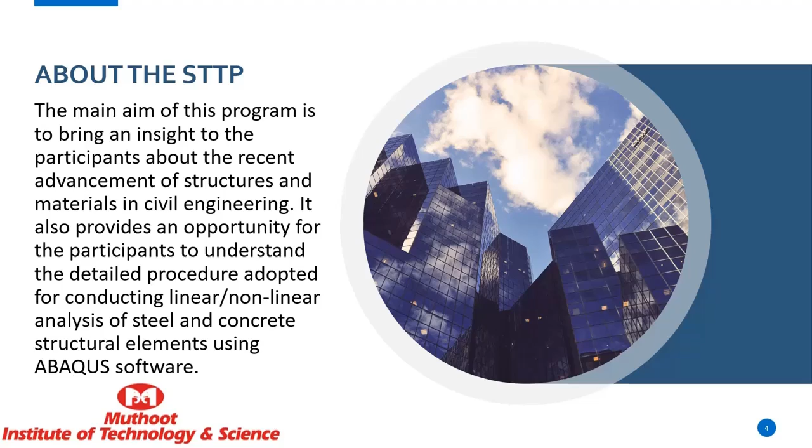Looking for that. Yeah, okay.

The technological developments taking place require that we think ahead of time, and we need to anticipate what changes will occur, because we have seen many businesses which are now not in existence because they were not able to catch up with time. So we need to think about what's going to happen down the line, 10 years, 20 years, 100 years. That gives a greater scope for man to develop himself. We need to think concretely about the days to come. We are in the 21st century - what may happen to this particular concrete in the next century?

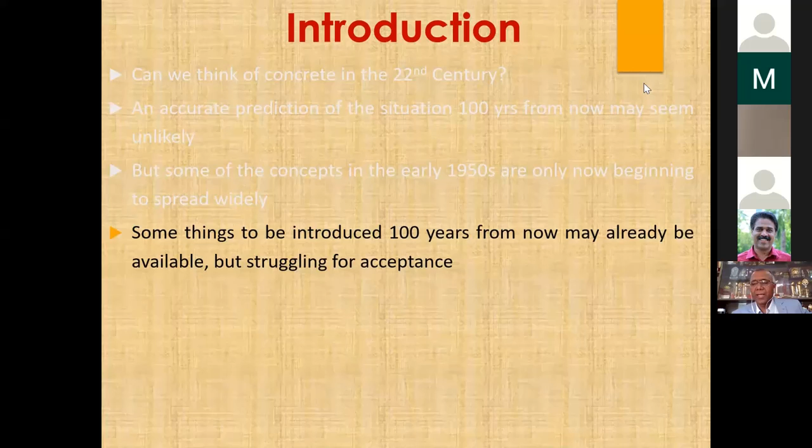If you look at concrete for the last 100 plus years, there has not been much change. That means there has not been a material which can completely replace reinforced cement concrete, as all of us agree upon.

Reinforcement, that is the steel. If you look at these metropolitan cities, the skyscrapers, new materials have made all these things quite possible.

The advantages of FRP, just to know in general, the main thing is the high strength to weight ratio. They are light.

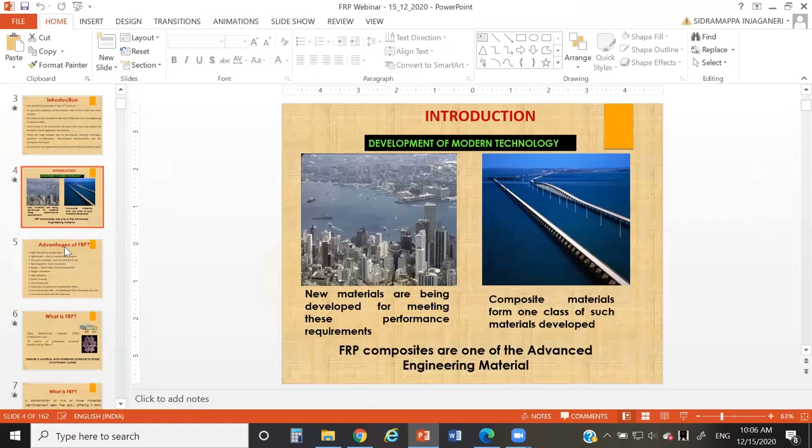High fatigue resistance, high reliability, good finishing, low tooling cost, impervious to pests and woodpecker attack, environmentally safe, no leaching of toxic chemicals into soil, less maintenance, and low life cycle cost.

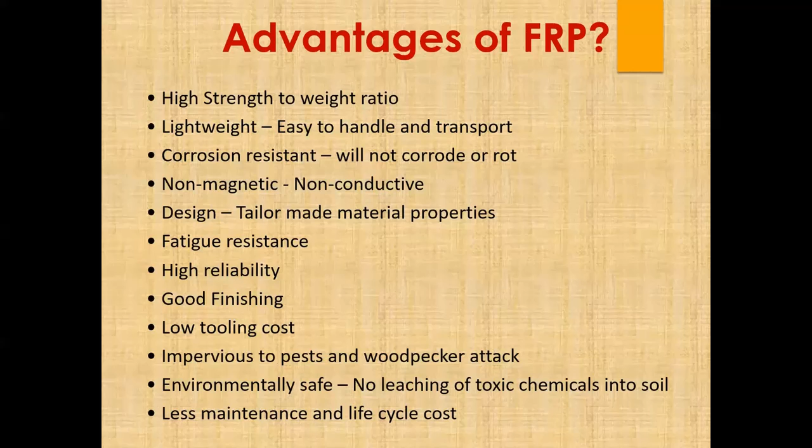So what is FRP? We have basically fibers which have been reinforced.

The constituents retain their identities.

Hello, sir. Sir, you're audible now, okay.

The constituents retain their identities, that is, they do not dissolve or merge into each other, although they act in concert. Normally, the components can be physically identified and exhibit an interface between each other.

So the concept is very much similar to reinforced concrete, where steel is reinforced in the concrete. Here, the fibers are reinforced in the polymer or the resins, what we call.

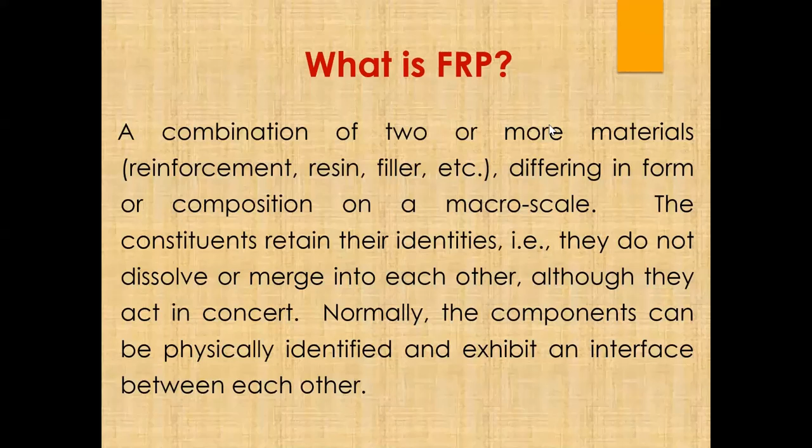Plastics are durable but have low strength. The fibers, if you take glass fiber, have high strength but are brittle. Fiber reinforced polymer is going to have a combination of these two characteristics of the materials, that is, durable and high strength.

Compared to other engineering materials, composites have different properties. The difference between composites and other materials.

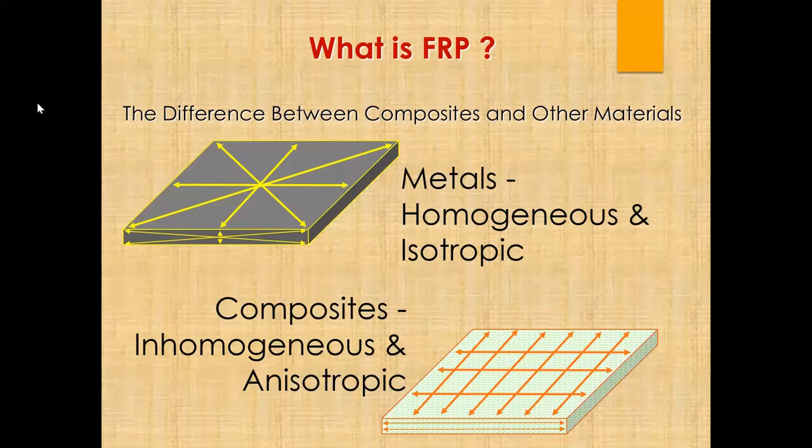What we assume in reinforced cement concrete is that the material is homogeneous and isotropic, but on the contrary, fiber reinforced polymer composites are inhomogeneous and anisotropic. That means they do not have the same properties in all directions.

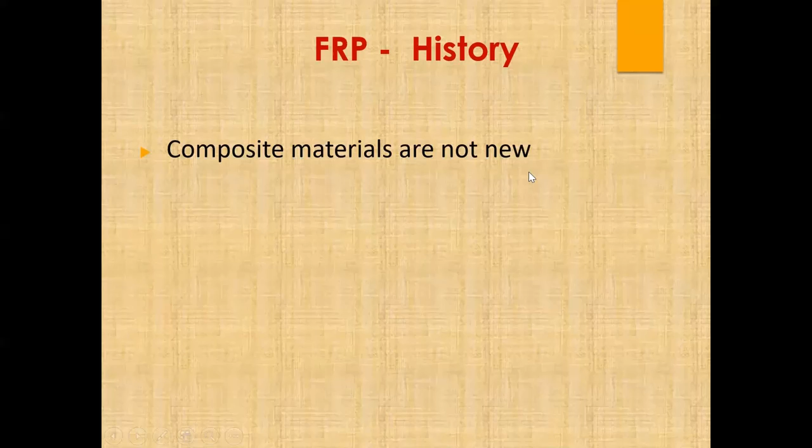If you look at the history, composite materials are not new. They have been used for many centuries - the concept is not new. They have been used since antiquity. Straw in clay, brick.

Other small products that you quite commonly see are boat hulls, pressure vessels, submarine parts, rocket shells, aircraft components, automobile bodies. You look at any commodity now, they are all made out of FRPs. Windmills, chimneys, mine sweeping vessels, swimming pools, partitions, doors, furniture - in all walks of life these have become very common now.

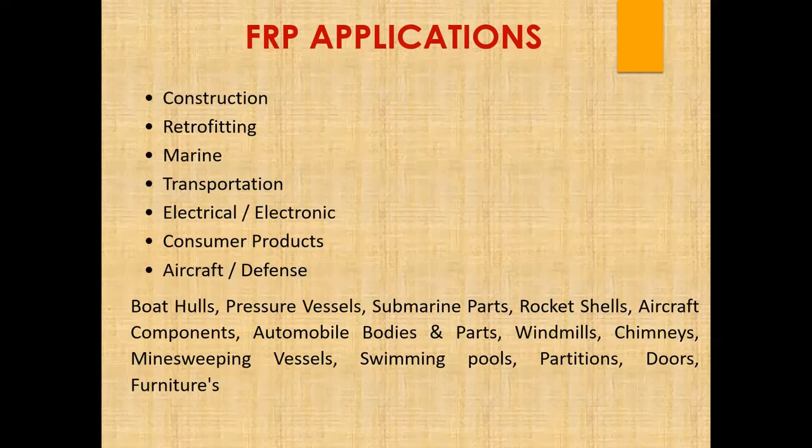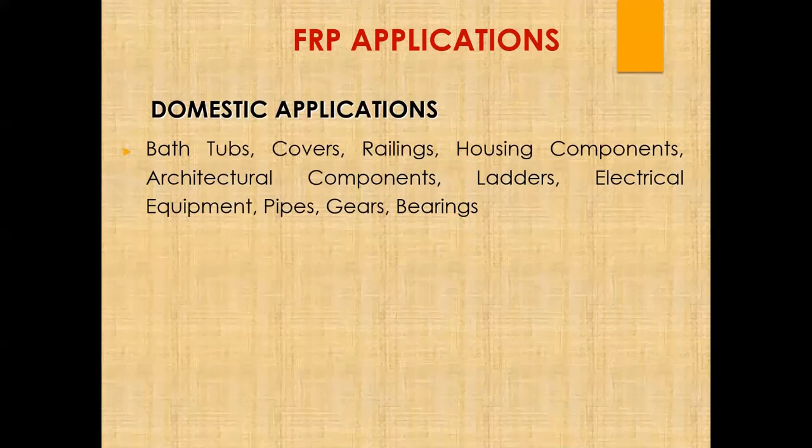Domestic applications, plenty: bathtubs, covers, railings, housing components, architectural components, ladders, electrical equipment, pipes, gears, then recreational uses: fishing rods, tennis rackets, ski equipment, golf clubs, recreation boats, skates, etc.

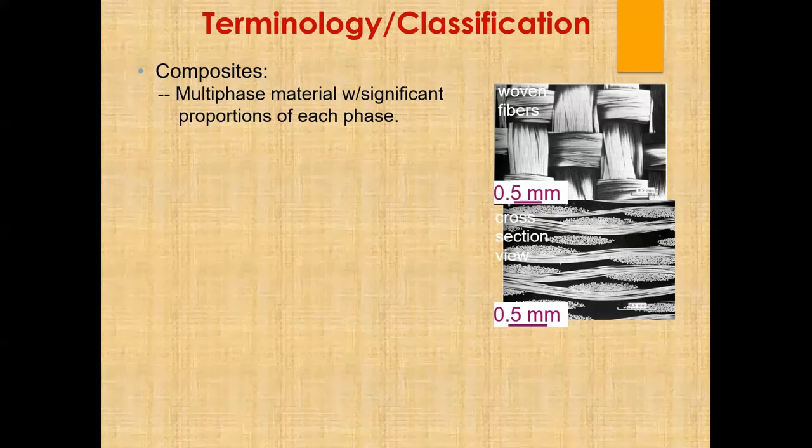The other terminology of the classification: these are multi-phase materials with significant proportions of each phase. Matrix is the continuous phase, whose purpose is to transfer stress to other phases and protect phases from the environment.

We have varieties here, whether it is metal matrix composites, ceramic matrix composite, or polymer matrix composite - they are all in the matrix phase.

The purpose here is that fibers enhance the matrix. MMCs increase the yield strength and creep resistance. CMC ceramics increase the temperature resistance. PMCs increase the modulus of elasticity, the yield strength, and the creep resistance.

Now, if you look at the fiber reinforced polymer composites, the whole terminology will always confuse researchers. FRP, popularly known as fiber reinforced polymer. Apart from that, we also now have basalt fibers being used, which have significance in the field of civil engineering applications.

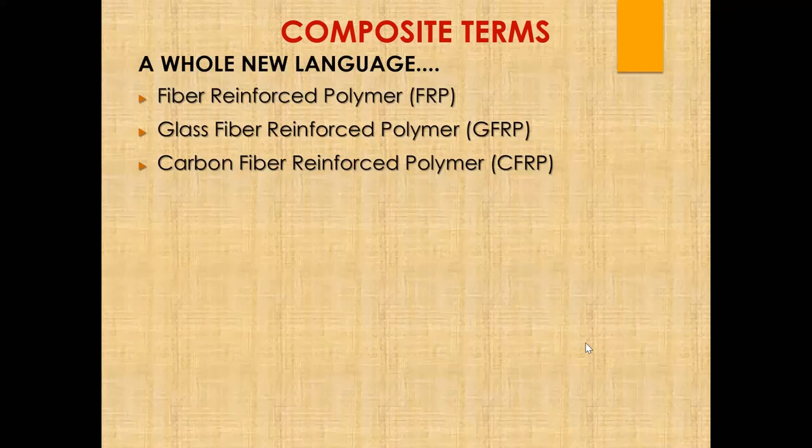Classification of these composites, in a broader sense, can be as particle reinforced, fiber reinforced, then from the structural aspect, either laminates or sandwich panels. These fiber reinforced composites can be in the form of continuous fibers or discontinuous short length fibers.

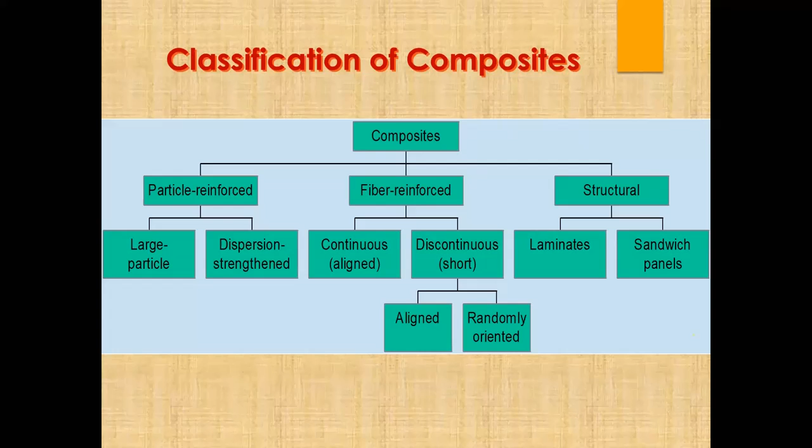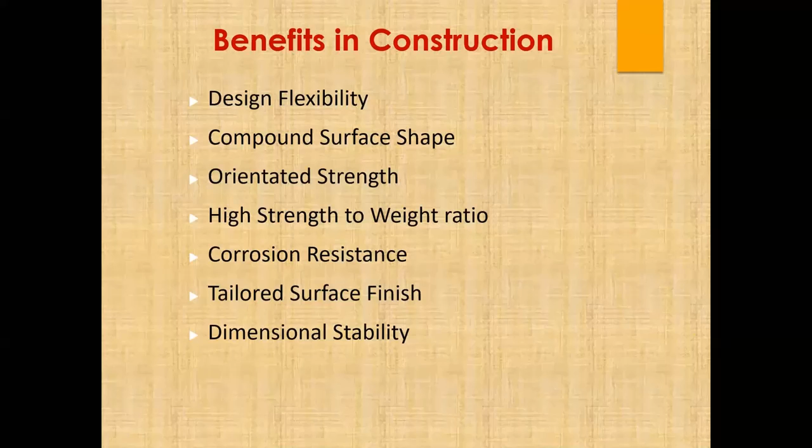In the construction industries, it is widely being used: roads, highways and bridges, ports, harbors and waterways, electric power generation and telecommunication, water and wastewater transmission, rail and mass transit, retrofitting. The benefits in construction are design flexibility, compound surface shapes, oriented strength. The main advantage is that in the direction of fiber orientation, you can get the desired strength, high strength to weight ratio, corrosion resistance, tailored surface finish, dimensional stability, low thermal conductivity.

So the constituents in FRP, the main ones being the fibers and the matrices. Matrices in the sense it is resins or polymers. Apart from that, we also use coupling agents or fiber surface coating. This agent is a compound which provides a chemical bond between two dissimilar materials, usually an inorganic and an organic. Fillers are also used. Fillers not only reduce the cost of composites but frequently impart performance improvements. For example...

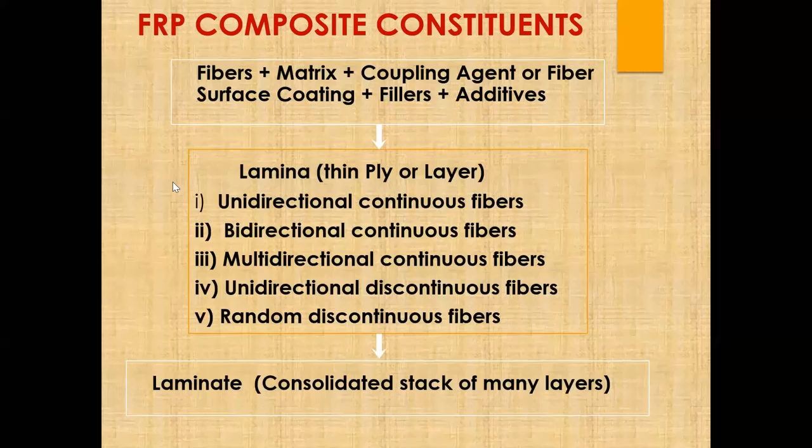These fibers plus matrix plus coupling agent and other fillers and additives, depending upon the requirement, may be used to form thin ply, known as a lamina. So when you have a thin ply, the orientation of the fibers may be unidirectional continuous fibers, bidirectional continuous fibers, multi-directional continuous fibers, unidirectional discontinuous fibers, or random discontinuous fibers. The laminate is the stacking of various laminas, with individual laminas consolidated to formulate the appropriate thickness to give the requisite properties or strength.

The properties of fiber reinforced polymer composites vary depending upon the type of fiber and resin selected, the fiber content, the volume fraction of this fiber content, the fiber orientation, as well as the manufacturing process.

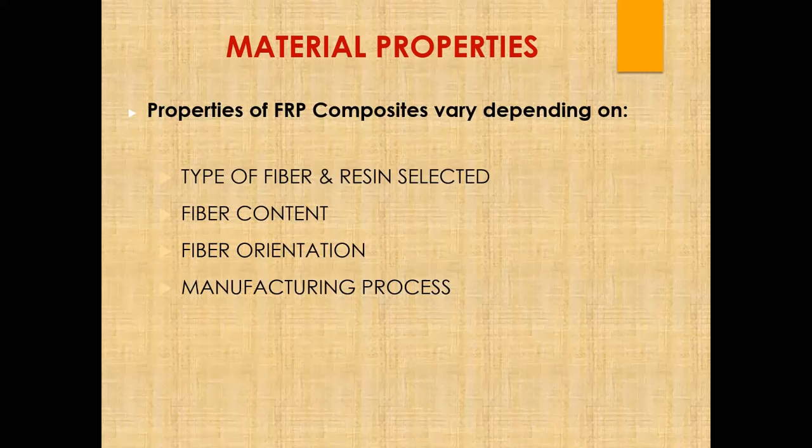In new constructions, we have unlimited applications. It can be used as per our choice. Structural components also can be cast, that is beams, columns, bridge decks. Then for reinforced concrete, we have internal reinforcement. Apart from that, pre-stressing and post-tensioning, then external reinforcement. In a similar way, these things also can be used.

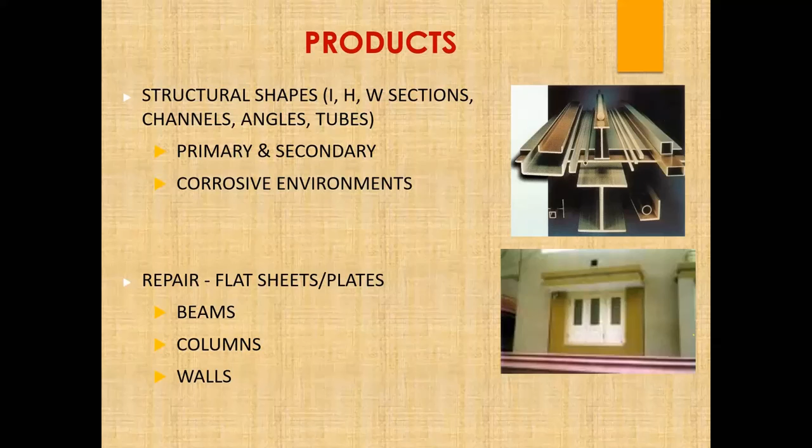Some of the products that you can see are structural shapes manufactured through the pultrusion process, which can be in various shapes similar to steel structures. They look as elegant as that, or even more elegant. Then there's repair for beams, columns, and walls for retrofitting.

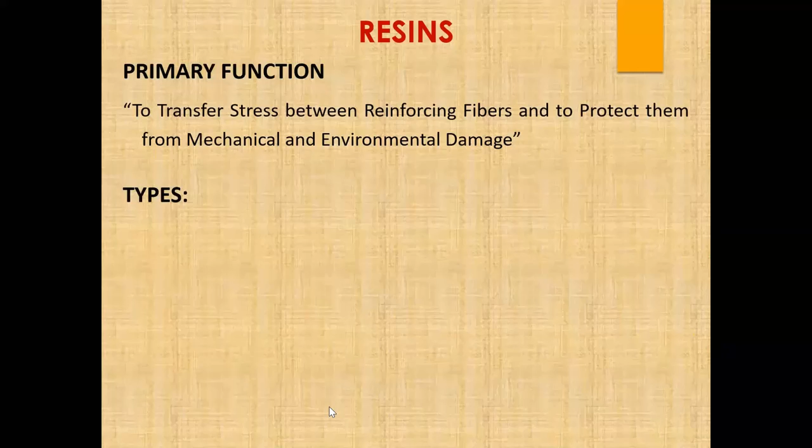The main difference between thermoset and thermoplastics: the primary difference is that thermoset is a material that strengthens when heated, but cannot be remolded, reused, or reheated after the initial forming or setting. Thermoplastics can be reheated and remolded and cooled as necessary without causing any chemical changes, so they can be reused. As a result of these physical and chemical properties, thermoplastic materials have low melting points, while thermoset products can withstand high temperature without loss of structural integrity.

There are other differences we can compare between these two. Thermoplastic can be synthesized by the process called addition polymerization. Thermosetting plastics are synthesized by condensation polymerization. Thermoplastic is prepared by injection molding, extrusion process, blow molding, thermoforming process, and rotational molding - these are the different processes. Thermosetting plastic is processed by compression molding and reaction injection molding at the time of manufacturing.

Thermoplastics have secondary bonds between the molecular chains, whereas thermosetting plastics have primary bonds between the molecular chains, held together by strong cross-links. Thermoplastics have low melting points and low tensile strength, whereas thermosetting plastics have high melting points and tensile strength. Thermoplastic is lower in molecular weight compared to thermosetting plastic, which has a high molecular weight.

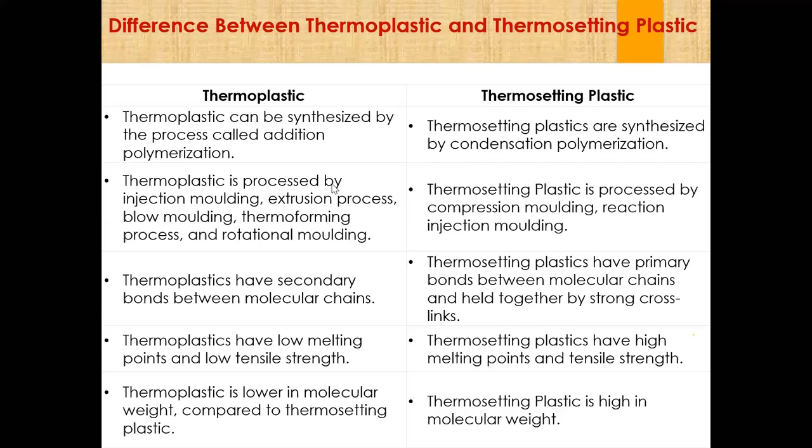Some commonly used materials as thermoplastics and thermosetting polymers: for thermoplastics, we have polystyrene, Teflon, acrylic, nylon. For thermosetting, vulcanized rubber, bakelite, polyurethane, epoxy resin, vinyl ester resin, etc. These are only indicative in nature, but there are many more that can be used.

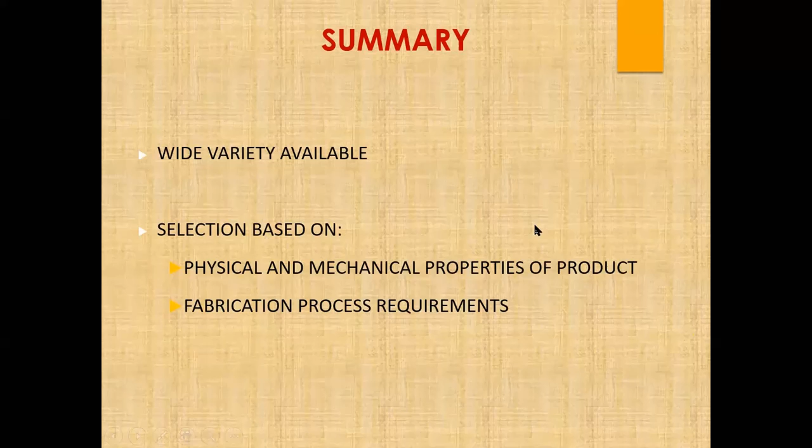So in summary, wide varieties are available in terms of resins. Selection is based on physical and mechanical properties of the product, then fabrication process requirements.

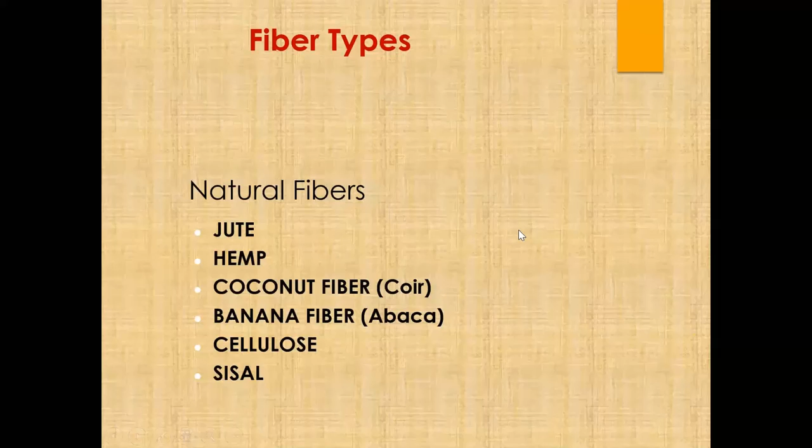Fiber, cellulose, sisal, and all these have been used widely since many centuries or many decades. Natural fibers are grown worldwide and are commonly available. They are used for making ropes, carpets, bags, etc. Recently, natural fiber reinforced polymers have created interest in the automotive industries for varied reasons.

They are environmentally friendly and biodegradable. The energy required to produce them is very small. The density of fibers is in the range of 1,250 to 1,500 kg per cubic meter compared to reinforced cement concrete, which is around 2,500 kg per cubic meter. For e-glass, used as a reinforcement, it is around 1,800 to 2,100 kg per cubic meter, or 2,540 for e-glass and 1,800 to 2,100 for carbon fibers, while reinforced cement concrete is around 2,500.

The advantages of natural fibers: the modulus to weight ratio of some natural fibers is greater than that of e-glass fibers, meaning they are competitive with e-glass fibers in stiffness critical design. Natural fibers provide higher acoustic damping than e-glass and carbon fiber composites, making them suitable for noise attenuation, which is important in interior automotive applications. Natural fibers are also less expensive than glass and carbon fibers.

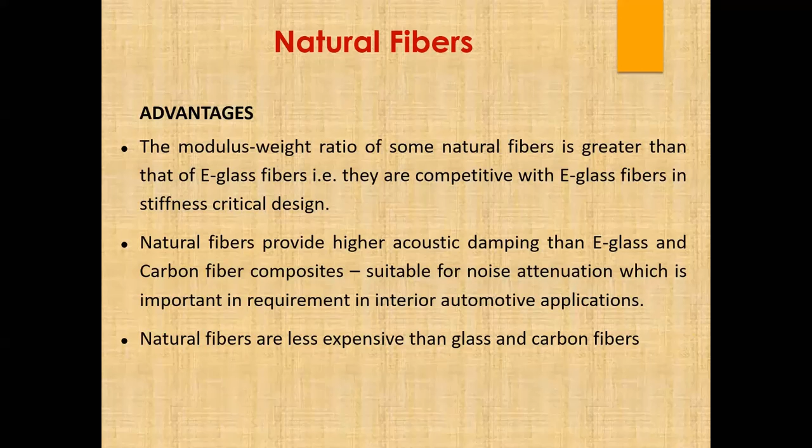The limitations or disadvantages of natural fibers: the tensile strength is relatively low, though not very low. They have a low melting point and moisture absorption issues, and at temperatures higher than 200 degrees, they start to degrade.

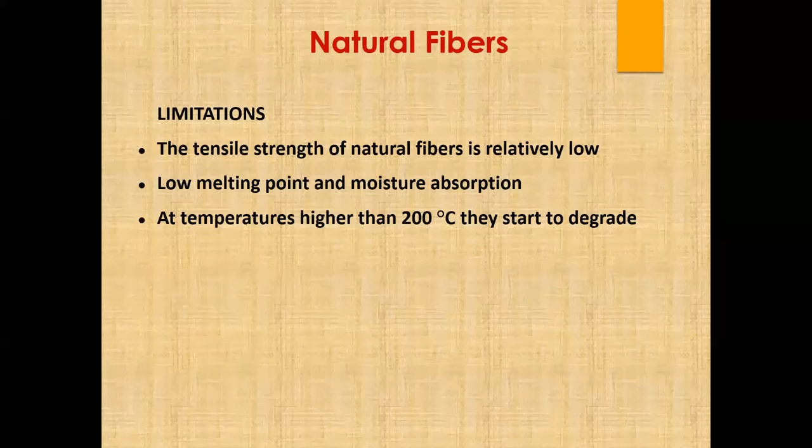Coming to some of the man-made fibers which are commonly used: aramid fibers, boron fibers, carbon fibers, glass fibers, basalt fibers, and even nylon, polyesters, and polyethylenes are being used. Polypropylene is also being used.

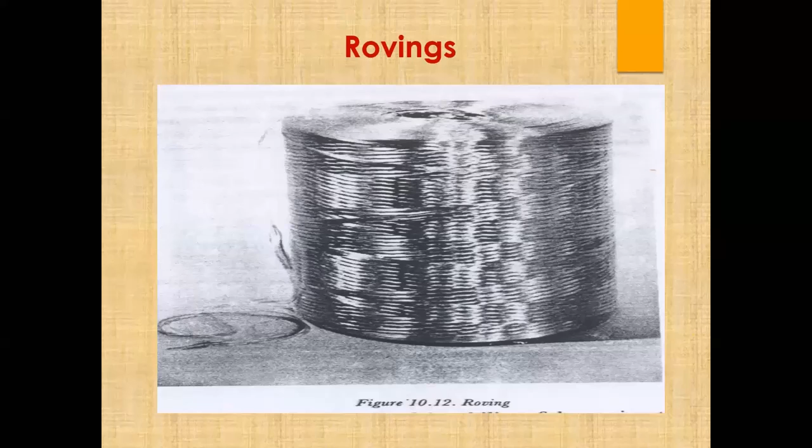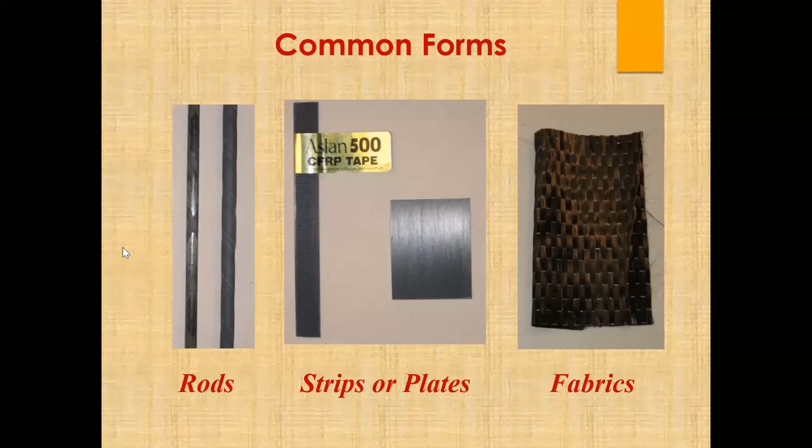These are the continuous ones, known as rovings, which come in circular bundles. Then there are woven rovings, woven in a single direction or in both directions. Then chopped strand mat, with some examples of how they look. Other common forms include rods, strips or plates, and fabrics, cables, and gratings. These fibers within the matrix can be arranged in plies in different directions: one parallel to the application of the load, 0 degrees, 45 degrees, minus 45 degrees.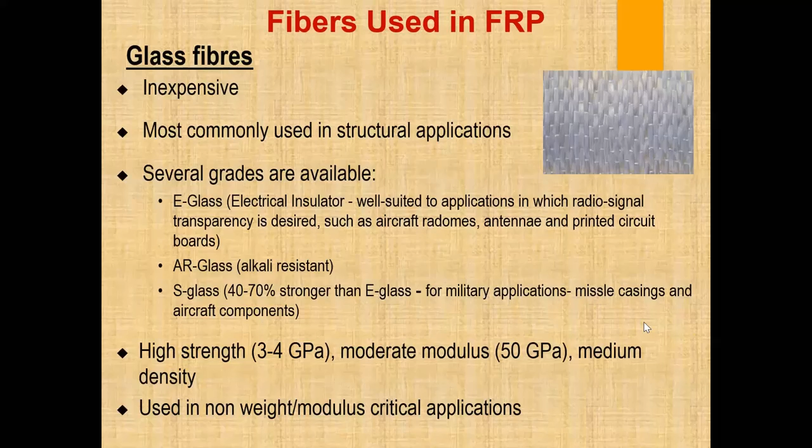Carbon fibers, which are quite common to us, have significantly higher cost than glass, with high strength and high modulus with low density. The modulus of elasticity varies approximately between 250 to 300 GPa for standard grade, 300 to 350 for intermediate, 350 to 550 for high, and even ultra high to the order of 550 to 1000 gigapascals. They have superior durability and fatigue characteristics, used in weight and modulus critical applications.

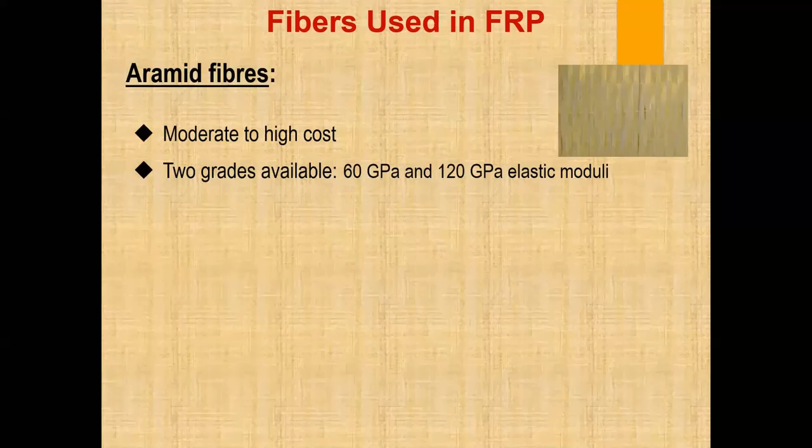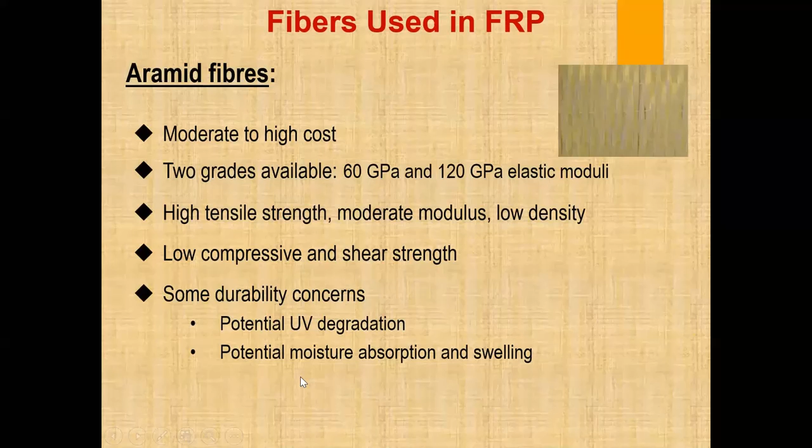Aramid fibers have moderate to high cost. Two grades are normally available, with 60 GPa and 120 GPa elastic moduli. They have high tensile strength, moderate modulus, low density, and low compressive and shear strength. Some durability concerns include potential UV degradation of these fibers and potential moisture absorption and swelling.

There are several manufacturing processes commonly used. The simplest among all is hand layup or spray up. Then resin transfer molding, popularly known as RTM, compression molding, injection molding, reinforced reaction injection molding (RRIM), and the pultrusion process, which is very common and used to manufacture reinforcing bars, quite commonly used in structures now. Then filament winding, vacuum assisted RTM, and centrifugal casting.

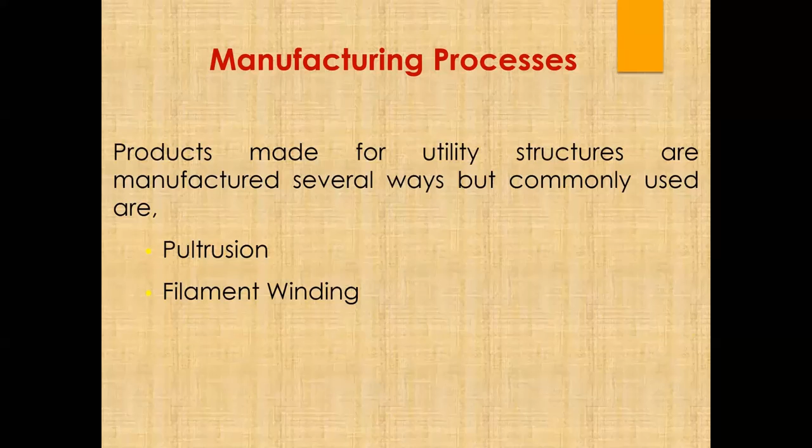Products made for utility structures are widely manufactured in several ways, but the commonly used ones are pultrusion and filament winding. In the typical schematic representation of a pultrusion process, you have a reinforcement in the form of rovings. It is impregnated into a resin, then subsequently cooled. Then you have downstream tooling and upstream tooling, wherein at the end, based on the desired length required, these are automatically cut off. So this is a very simple way of getting the required members for structural use.

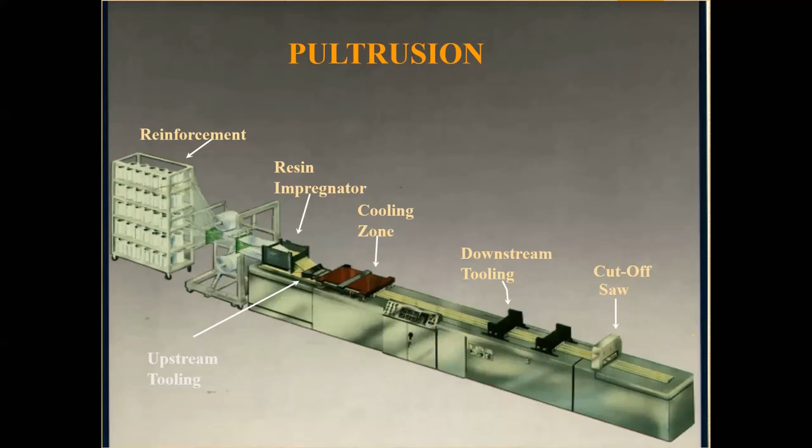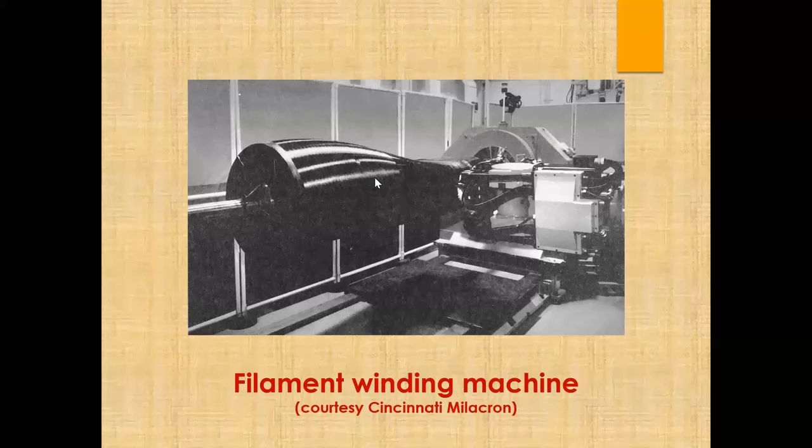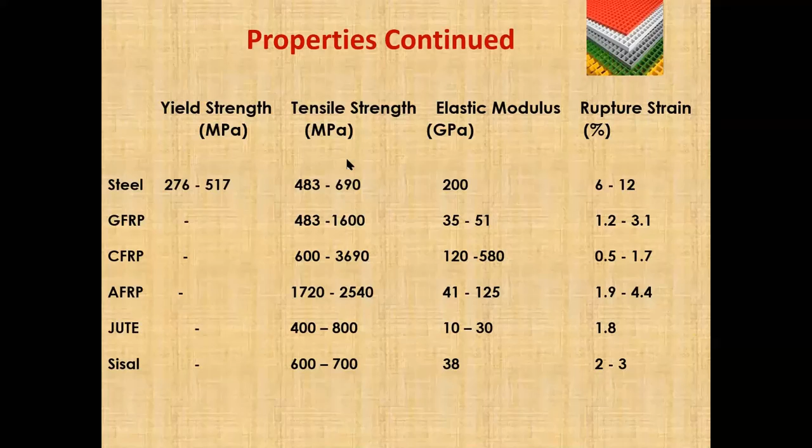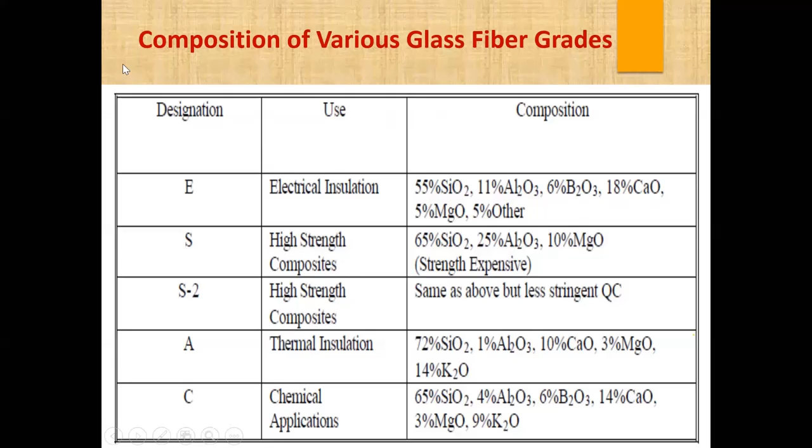So the typical composition for the different types of glass fiber - classified as E, S, A, and C - the use is electric insulation for E-glass, then high strength composites with very high strength, high strength composites with stringent quality control named S2, then thermal insulation, then chemical applications. The typical composition for E-glass will be around 55% SiO2, 11% Al2O3, 6% B2O3, 18% calcium oxide, 5% MgO, and 5% rest of the other materials. So in a similar way, the compositions vary for these materials manufactured in different ways.

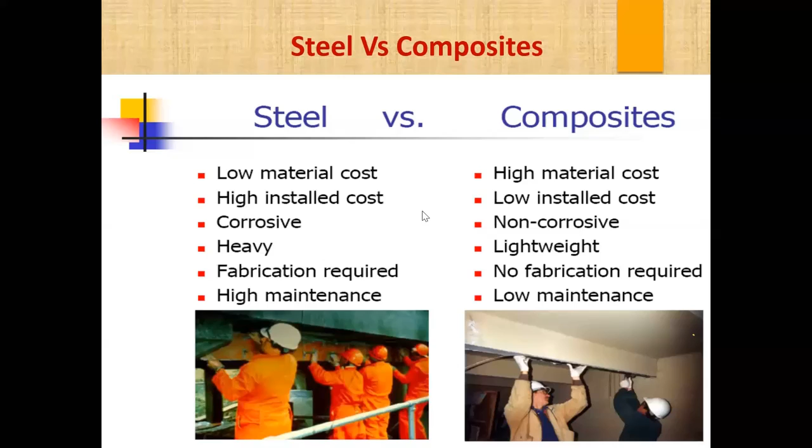Steel versus composites, if you look in general: steel has low material cost, high installation cost, is corrosive, has more weight or density, requires fabrication, and has high maintenance cost. Similarly, if you look at composites, they have high material cost, low installation cost, are non-corrosive, lightweight, require no fabrication, and have low maintenance cost. So in general, composites have many advantages over steel.

Some of the applications, if you look at it, there is an enormous variety of applications in which FRPs can be effectively used in structural engineering and infrastructure applications, because of different types of shapes and properties of FRP materials.

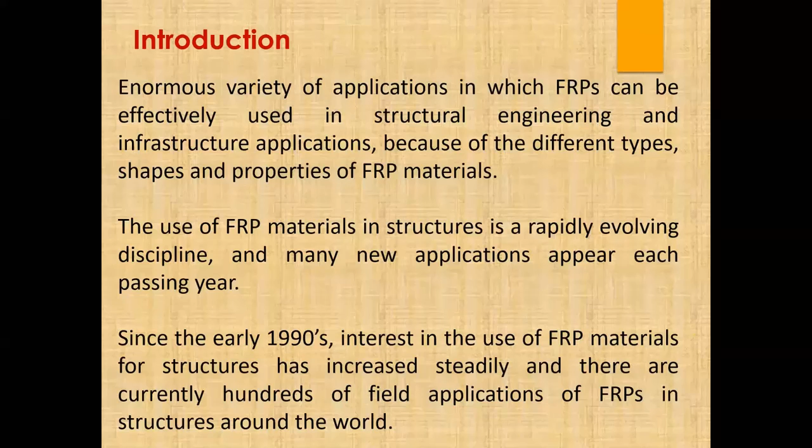It will depend upon whether the applied load is tensile or compressive. FRP has a better tensile strength as compared to a poor compressive strength. The response of an FRP material in tension is dependent largely on the failure strains of the two component materials, the resin as well as the fiber, as happens in reinforced cement concrete. These are typical photographs of carbon and glass fiber, and as already discussed, the stress-strain behavior for different types of fibers - e-glass, aramid, standard carbon - then reinforcing steel, which is shown horizontal.

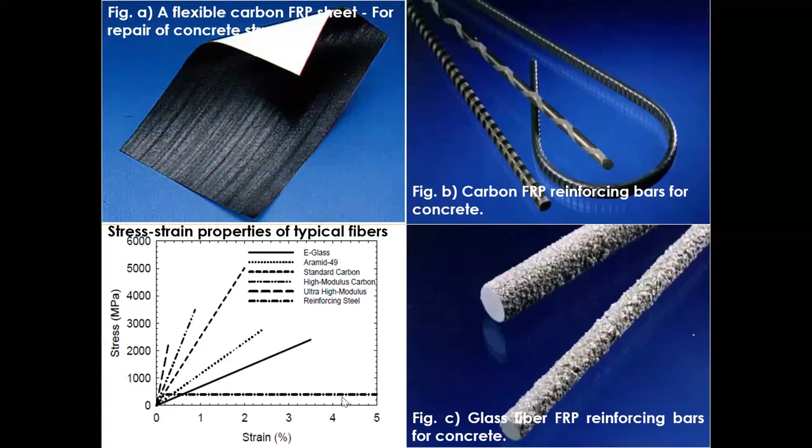The strength and stiffness of FRP are governed by the fibers. However, the overall behavior depends upon the mechanical properties of the matrix. The other important thing is the fiber volume fraction, that is the volume of fibers per unit volume of FRP. Then the fiber cross-sectional area available, that is the percentage of reinforcement, then orientation of the fibers within the matrix and the method of manufacturing. It is the interaction between the fibers and the matrix that gives FRPs their unique physical and mechanical characteristics.

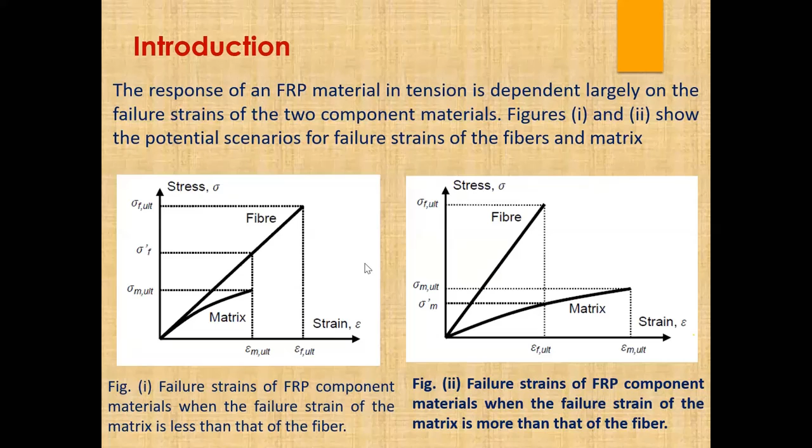The orientation of the fibers within the matrix is a key consideration in the design of the use of FRP materials. The response of an FRP material in tension is dependent largely on the failure strains of the two component materials - the matrix and the fiber. Between these two, we are able to get the corresponding properties of the fiber reinforced polymer composites.

If the failure strain of the matrix is less than the failure strain of the fibers, and the fiber volume fraction, normally designated VF in design, is small, say approximately less than 0.1, then the failure of the FRP is governed by the matrix itself. However, if the fiber volume fraction is large, meaning the quantity of fiber content is more, then the fibers carry the majority of the load, and the failure of the matrix is not critical. Then the load carrying capacity will be much more.

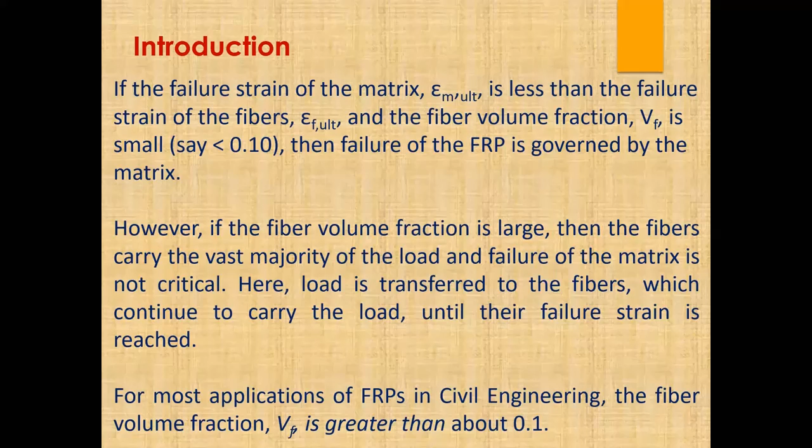For aramid and carbon FRPs respectively, the compressive strength of aramid is relatively very low, while that of carbon is very high. Aramid fibers perform particularly poorly in compression, and as a consequence, FRP strength is commonly neglected when acting in compression when used as reinforcement in concrete. In the case of pultruded FRP structural sections in compression or bending, the compressive strength of FRPs is relied upon to carry the load.

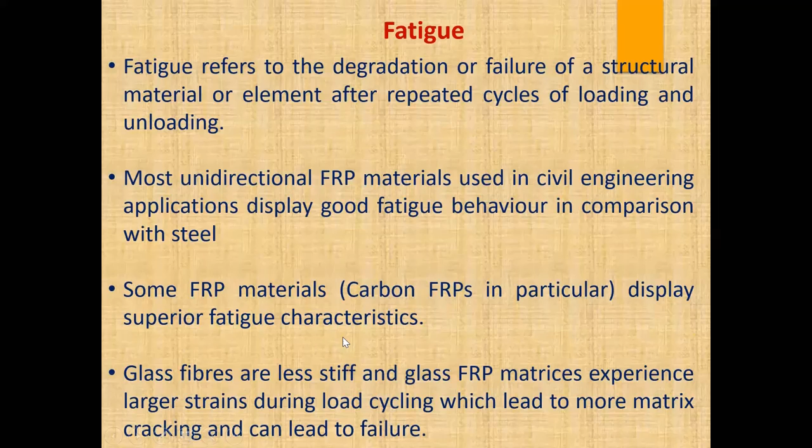The fatigue resistance of these FRP materials, especially carbon FRPs in particular, have very superior fatigue characteristics compared to the other fibers. Then some of the structures...

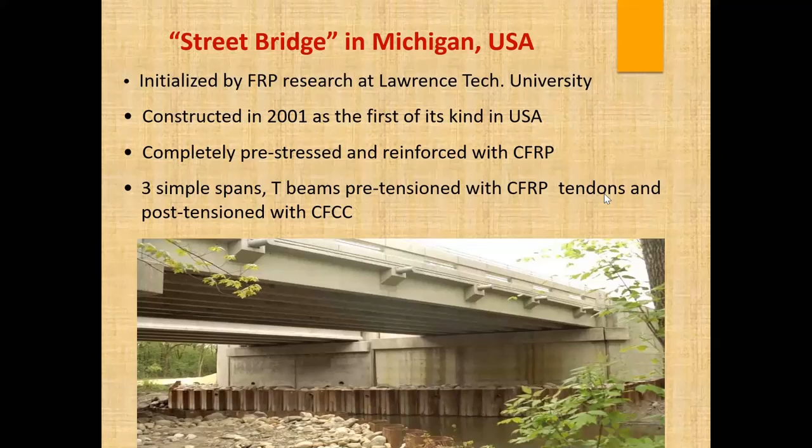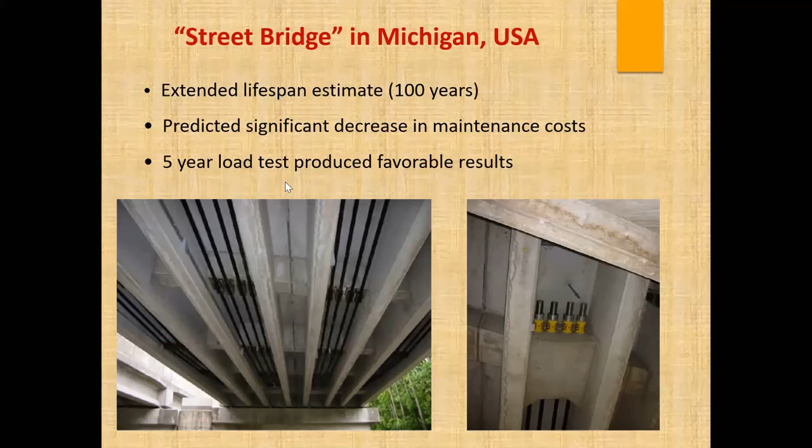This is a bridge in Michigan, constructed in 2001, completely pre-stressed and reinforced with CFRP, with 3 simple spans of T-beams pre-tensioned with CFRP tendons and post-tensioned also. This is one of the street bridges in Michigan, USA. The extended lifespan estimate is around 100 years, with a predicted significant decrease in maintenance cost. A 5-year load test produced favorable results.

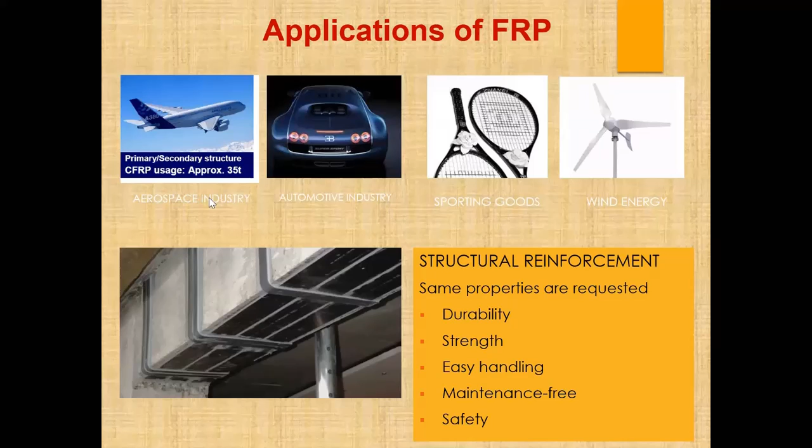These are some other typical applications showing reinforcement - bridge decks, culverts. Other applications can be seen in automobiles, recreation, aircraft (aerospace engineering), wind energy, and many other applications.

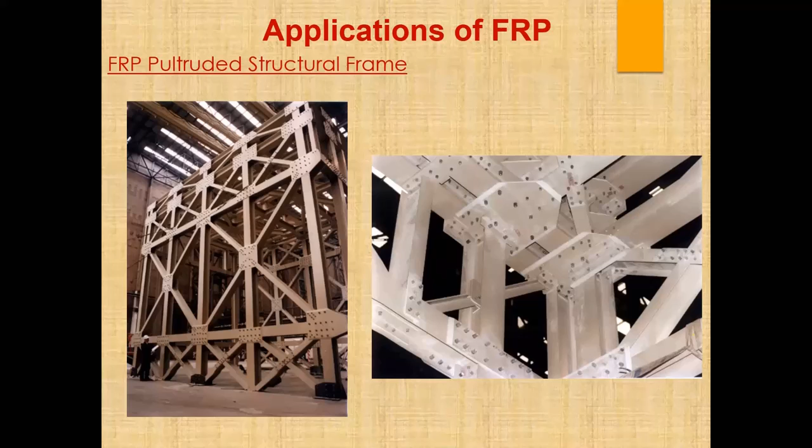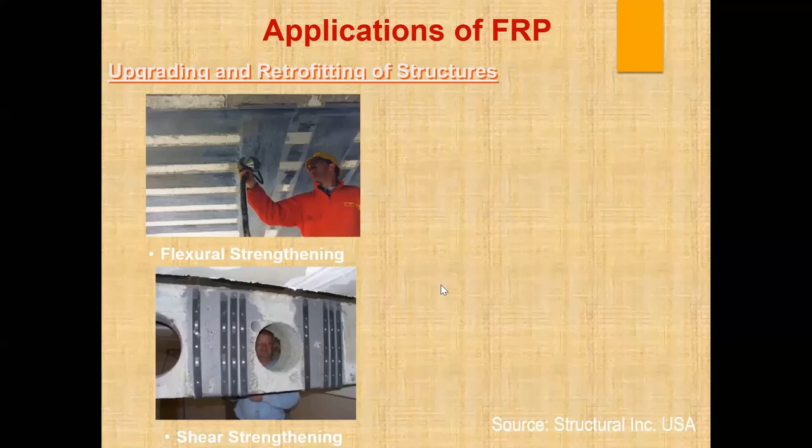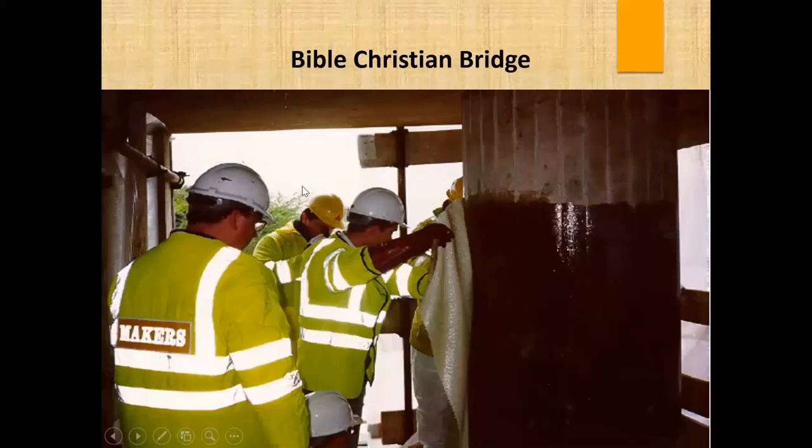Highly corroded structures can be strengthened using GFRP wrapping for piers, CFRP wrapping as well. This is one of the bridges where strengthening and retrofitting is being taken up, including strengthening of the pier caps in an experimental study.

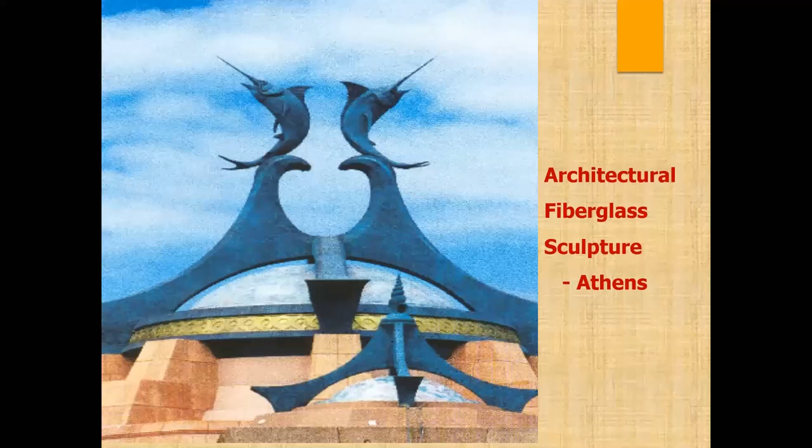An architectural fiberglass sculpture at Athens, and some other unique structures of GFRP, including innovative shipbuilding designs and stadiums.

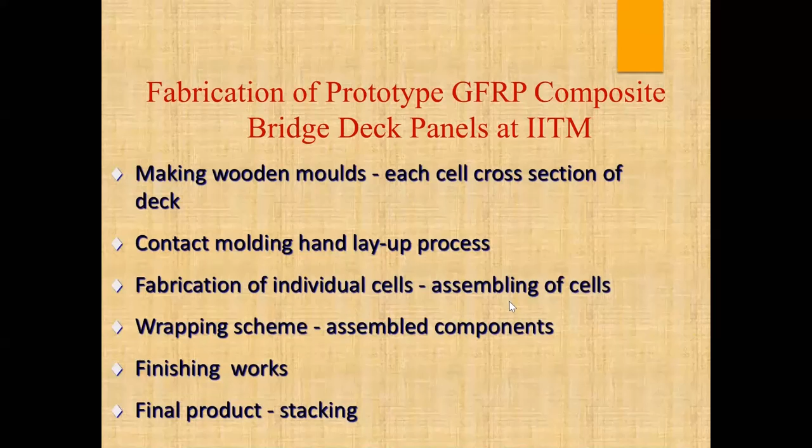One small thing I would like to talk about is a GFRP composite bridge deck which was cast by hand layup and tested by one of the research scholars, Veer Sudarshan Reddy, whom Professor Babu Kurian may also know. The first aspect was making the wooden molds for each cell cross-section of the deck, then contact molding hand layup process, fabrication of individual cells (the middle and end cells), assembling these cells, then wrapping schemes, finishing work, and the final product - these were the processes involved.

The materials used were resin vinyl ester, reinforcement ECR glass, woven roving mat of 610 GSM, then accelerator cobalt naphthenate, promoter dimethylamine, and catalyst methyl ethyl ketone peroxide.

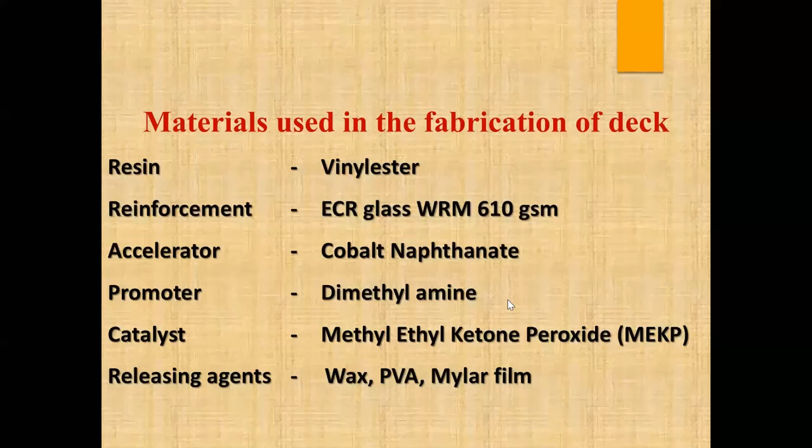The first coat of resin is applied on these, then glass fiber woven roving mat of 610 GSM is used and wrapped around this wrapping scheme on the end cell after the resin was laid. Subsequently, they apply resin after each layer.

And he is Dr. Sudarshan Reddy, our batchmate and a research scholar at IIT Madras.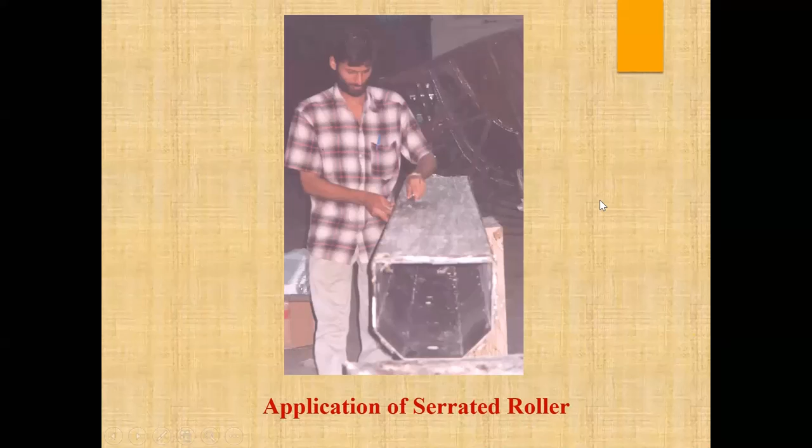Then rollers are applied in order to ensure there is enough bonding between the resin and the fibers, and that air gaps are removed. So this is one of the triangular cells.

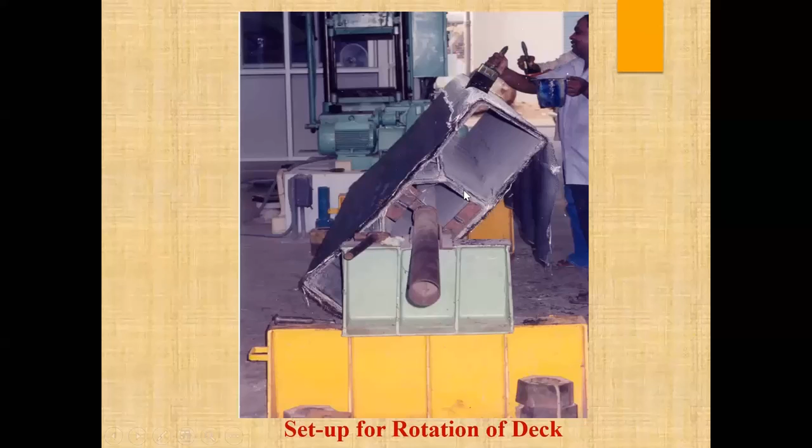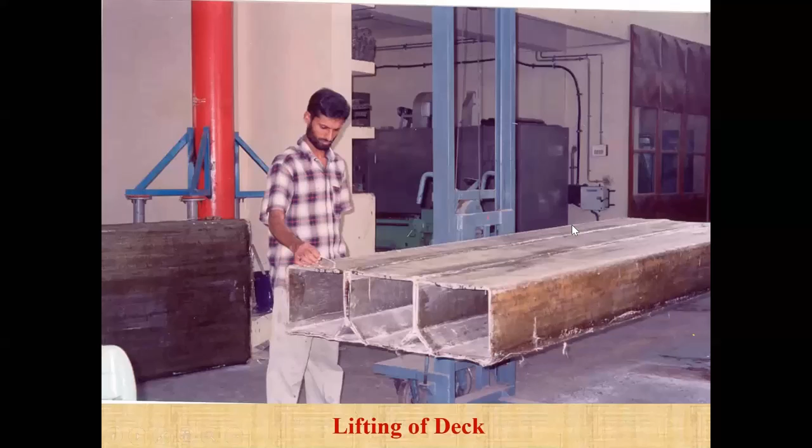So this is the overall view of the fabrication setup - lifting of the deck and shifting it. Trimming of the deck was also being done very precisely.

So the experimental study involved static testing - different positions of patch load were applied, and an IRC class A wheeled vehicle load up to failure. Fatigue testing was done around 10 kilonewton to 83 kilonewton, and 83 kilonewton to 400 kilonewton, at a frequency of 1 hertz for around 2 million cycles.

Then static testing of fatigue-tested GFRP composite bridge deck panels was done up to failure under monotonic loading. They were also tested for shear capacity.

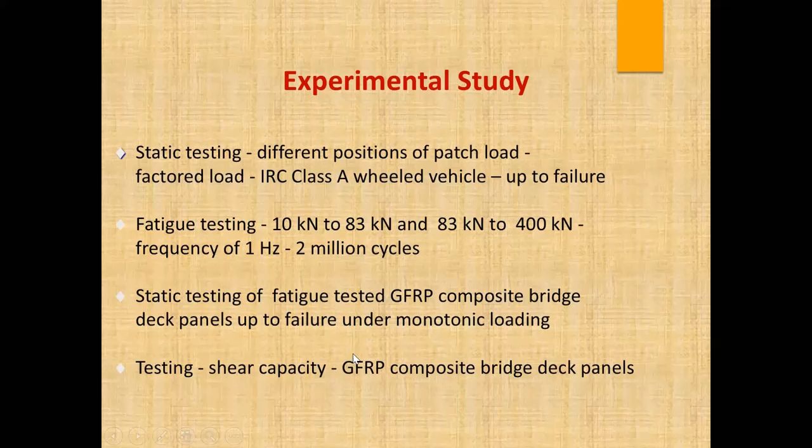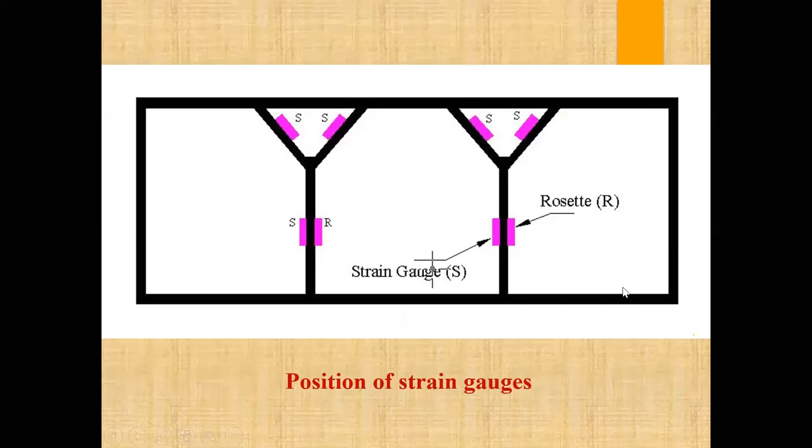So this is a schematic representation of the testing. These are the locations of the strain gauges in the cross section, and how the supports were arranged for testing.

Then simulation of the wheel load and the dead load on the bridge deck panel was done using slotted weights, and a neoprene rubber pad was also used for that.

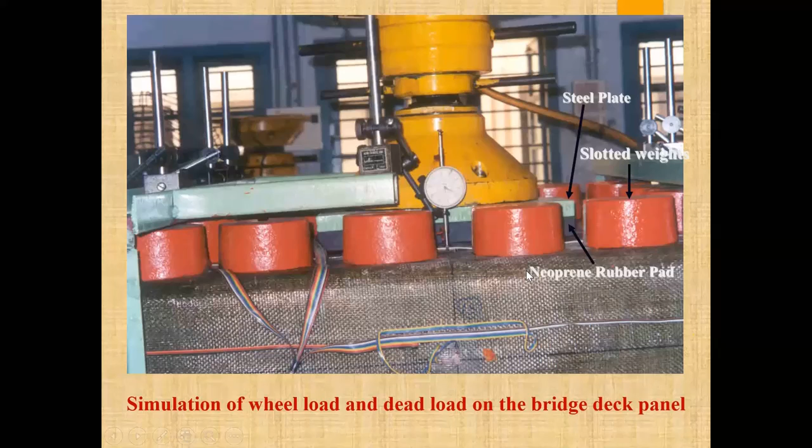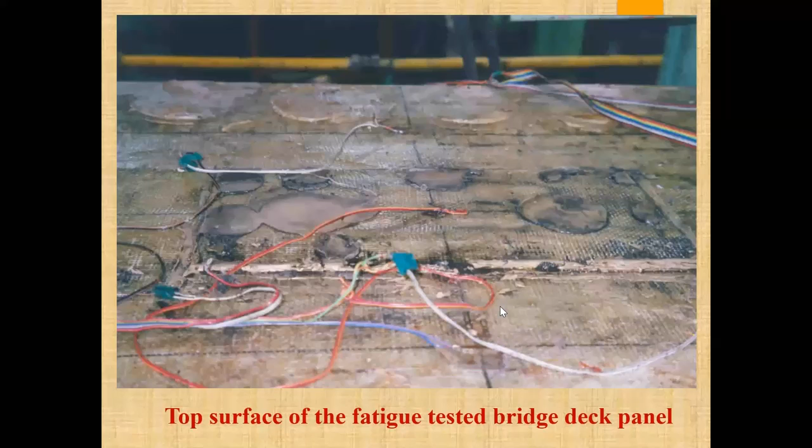So this is with regards to the top surface after the testing. This is for a typical shear test. In some of the locations, there was also delamination observed as the type of failure.

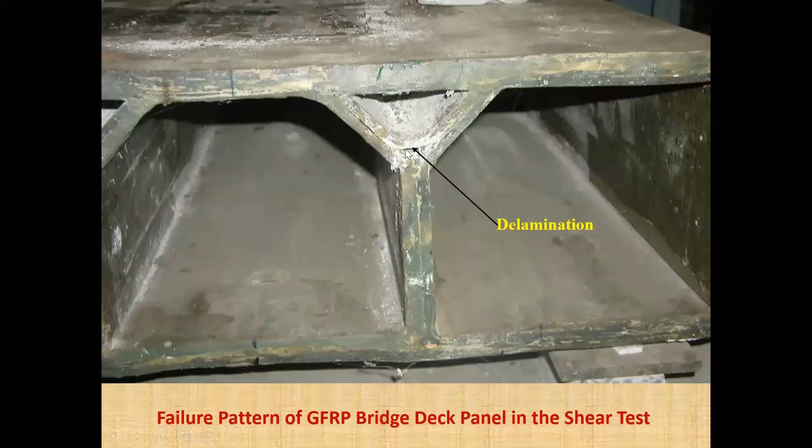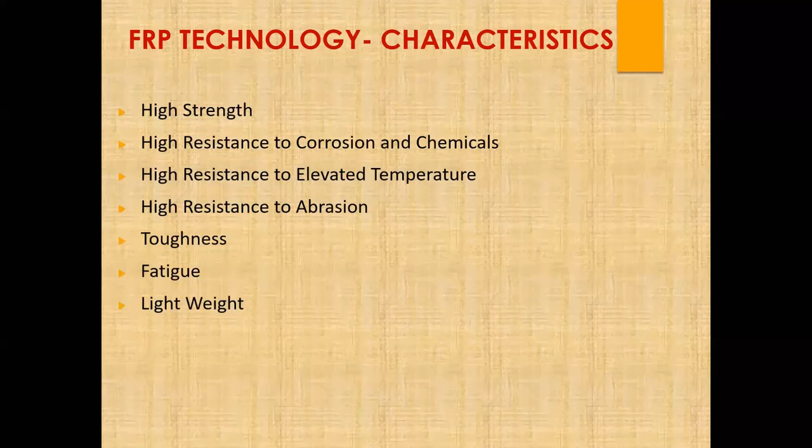So in that case, I would rather say FRP as a material in civil engineering has got very high strength, high resistance to corrosion and chemicals, high resistance to elevated temperature, high resistance to abrasion, high toughness, fatigue resistance, and is lightweight. The advantages being weight saving leads to fuel saving, increase in payload or increase in range which improves performance.

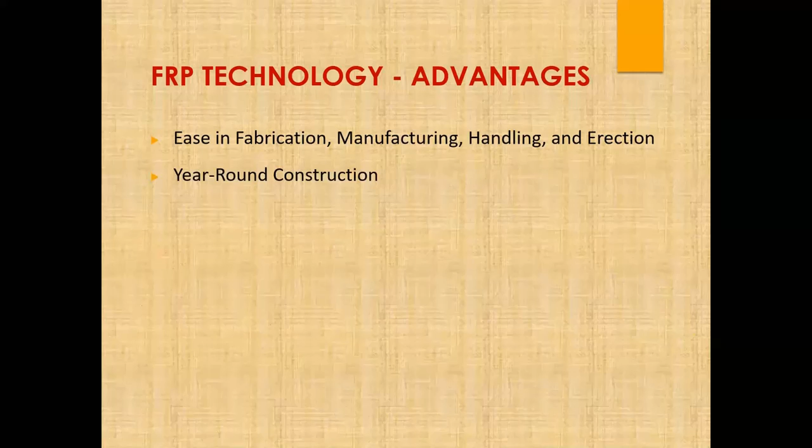Then good fatigue resistance leads to enhanced life, which involves savings in the long-term cost of the product. Good corrosion resistance means fewer requirements for inspection, resulting in savings in maintenance cost. Ease in fabrication, manufacturing, handling, erection, year-round construction possible, high performance, high durability, and excellent strength to weight ratio.

So some of the disadvantages: high initial cost, susceptible to creep and shrinkage, global and local buckling possible, aerodynamic instability due to lightweight, and requires highly trained specialists for construction.

Then lack of standards is one of the major problems, and design guidelines were also a problem while using it. This was earlier, but now sufficient guidelines have come up, and with these people are able to manufacture this particular product.

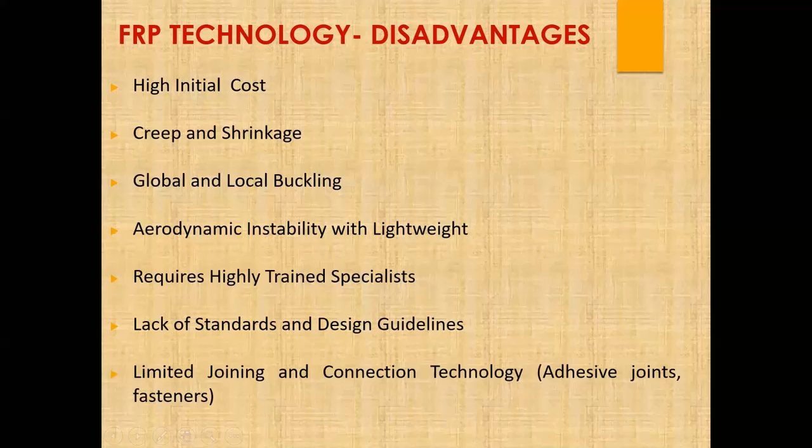Within the time allocated, I was just able to superficially give you the application of these FRPs in civil engineering. I think if there are any questions - to the best of my knowledge, because I do not work in this particular field, it was only the knowledge that I had gained at the time of doing one of the courses at IIT Madras.

Babuji? Yes, sir. Yes, sir. Yeah, yeah.

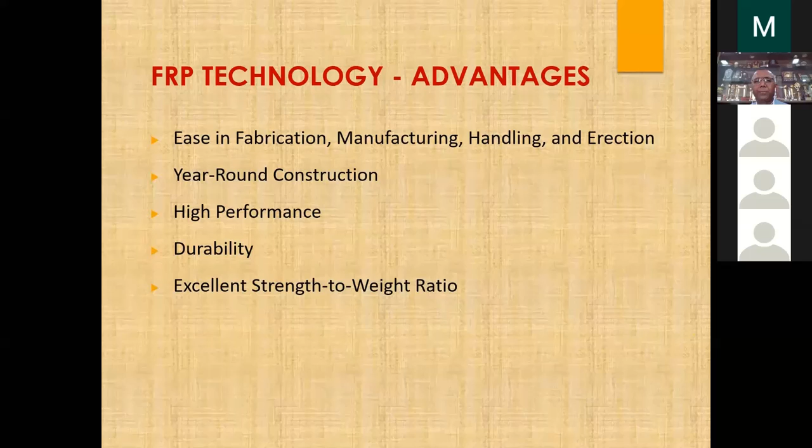So I would like to thank you, sir, for such an informative session on application of fiber reinforced polymer in civil engineering. In spite of some audibility issues in between, I'm sure the participants have got an insight into such a relevant topic in civil engineering. Please accept our sincere appreciation for the insightful presentation on fiber reinforced polymer, and thank you for sparing your valuable time and knowledge with us. We also look forward to your informative sessions in our future events as well. Thank you, sir. Oh, thank you.